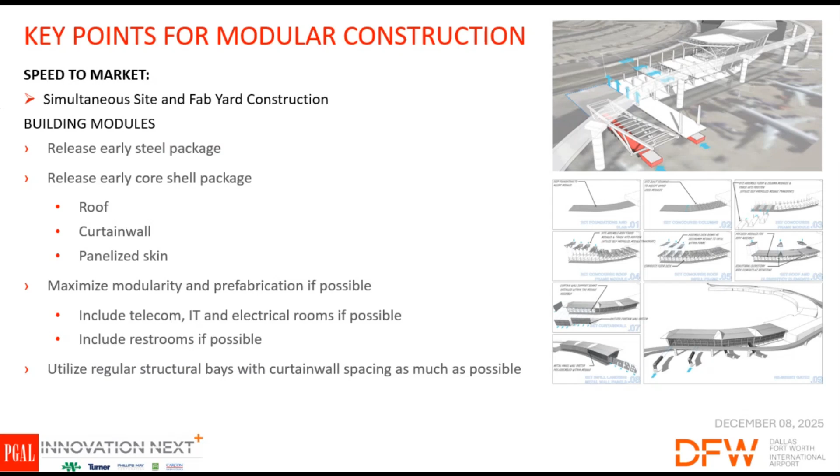There's a lot more possibilities in prefabrication. We can prefabricate electrical rooms and telecom rooms that we've looked into. So I think this is going to be an evolving industry. Other airports are copying this, so it's going to evolve from job to job.

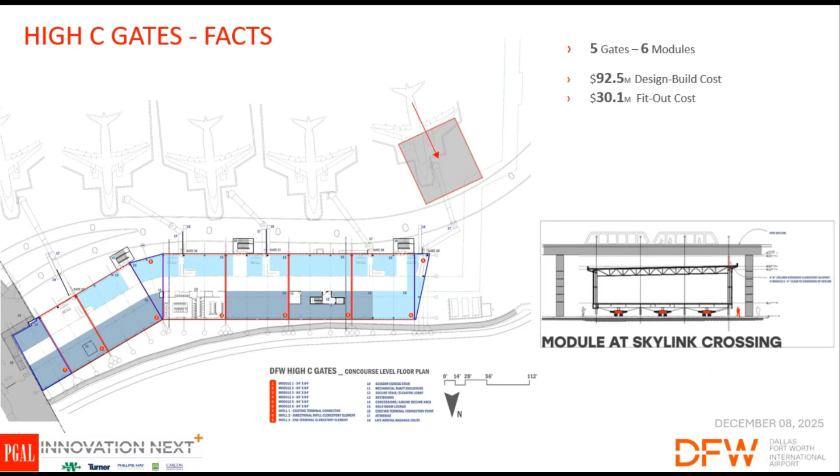So quickly, I'm going to go back a little bit on High C Gates. The size was done by necessity of dimensions. We were constrained by the Skylink, which you can see the curve on the top, and then the site on the edge. It was 5 gates and 6 modules, about $90 million of core and shell, and 30 of fit out.

So when we were designing this, we had to make sure the Skylink wasn't moving. We had constraints in the X direction moving through columns, and constraints in the Y direction going underneath the Skylink bridge. We measured it about 1,000 times, but we were nervous the very first day when we were moving the first module - is it going to fit? When the module's 50 feet away, we're thinking, oh that's going to hit. But we designed it for 12 inches of clear, and that's what we got.

This modular construction uses hydraulic lifting for the modules. The movers are SPMTs, self-propelled modular transport units. Mammoet is the company we've been using here, though there are other companies out there. Here you see we didn't put the full length of the columns on because we had to get underneath the bridge. So we got it under, spun it 90 degrees, and then for the first time, we lifted it up using hydraulic jacks in the SPMTs, which was the first time they used it.

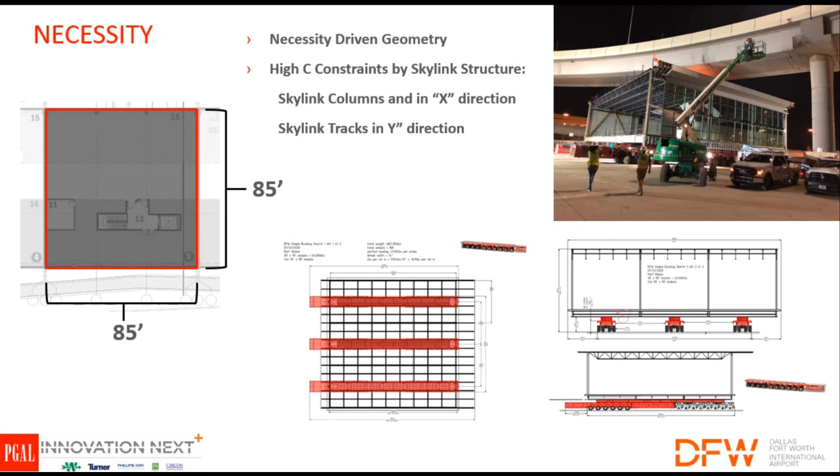That was pretty exciting. So we lifted it up, and then had to jack it up 9 to 10 feet. The columns were already there, three-quarter size columns. Then we drove through the columns and put it down on the columns that were already there. So that's kind of a baseline.

So now we're at Terminal F. Much bigger project - some of you drive by and can see it, even from the construction yard. Initially it's going to be 15 gates, about 400,000 square feet. We're doing 6 modules here, but much bigger. I'll show you here in a little bit. The first phase is 830 million.

So this project has evolved. When we were first hired, October 23rd, 2023, it was going to be domestic gates for all airlines other than American. So we go on our way designing for all the domestic carriers. We had a Skylink station here, and the Skylink tracks are here. So this was our first contract with the Skylink station there.

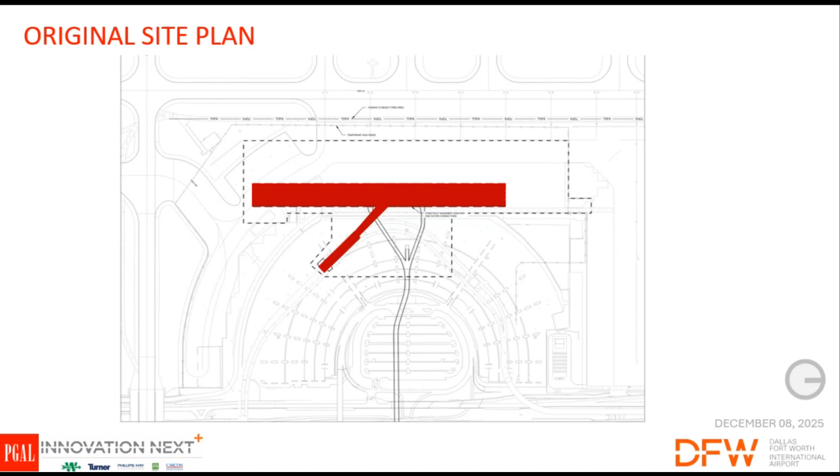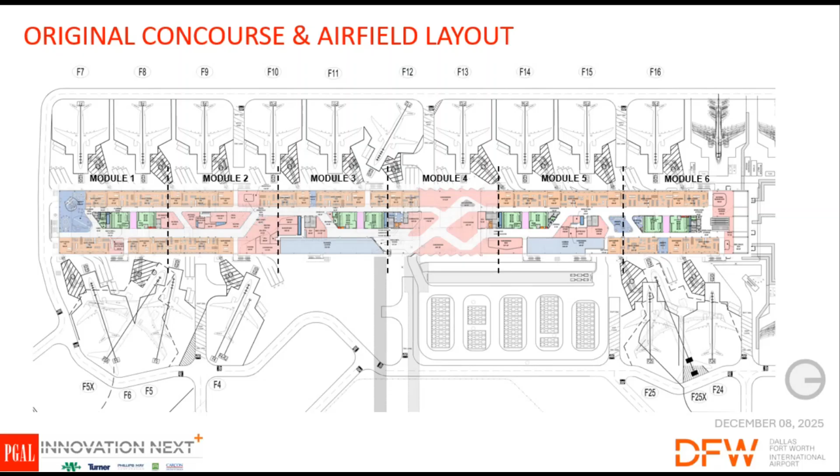This is the concourse level, the initial gate layout, and actually had planned for a tunnel. Some baggage, goods and services were going to come through the tunnel and serve the building to our basement. Our concourse plan - when American comes into play here in a little bit, you'll see that this end changes.

So when we're thinking through modular construction, you have to plan ahead. It's not just, well, the trucks show up, let's move it. You think early on, and our engineers on both sides have to have a good base. You have to have a good A to B path from the fab yard to the site. So there's a lot of logistics that go into doing this construction.

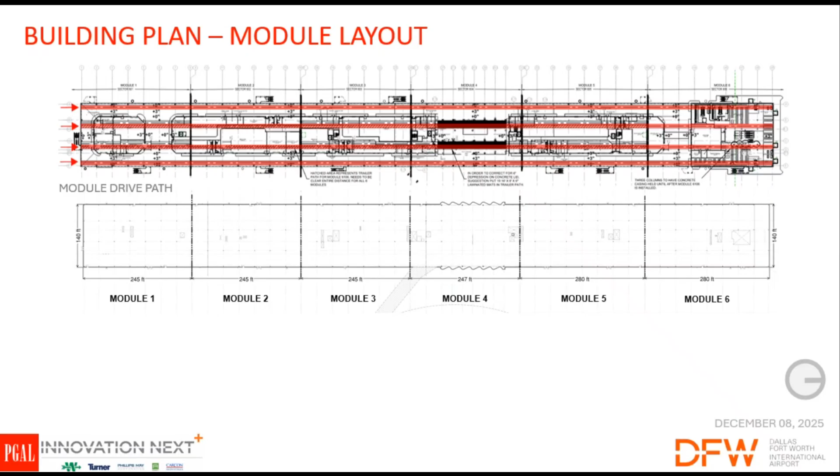We do overlays of our ramp, our ground level plan, making sure our pathway - the red lines are the pathways for the SPMT trailers. There's 4 trailers, so we think through it. And those are modules 1 through 6. So there's a lot of planning and engineering and back-checking all the way through this.

So this is a good combination drawing our structural engineers and civil engineers worked on together to help us think through this - thinking about where the proper place to load the SPMTs is on the grid of the structure. But then we have to get from A to B.

Zach here helped us figure out a good path, because our trailers are so large - 275 feet. We're not doing hydraulic lifting, we're doing basically static lifting on the SPMTs, which is only able to go up about 24 inches with the wheels that jack up. So if you've ever driven a trailer, you go over a bump or a change of plane, your bottom can drag, right? So the same thing is a worry on mod moves.

This was our path, looking through taxiway Alpha Bravo there to get into the site. Here it is - the pavement wasn't quite ready. We had to build a temporary ramp to get about a 1% grade to get to our site that Zach did.

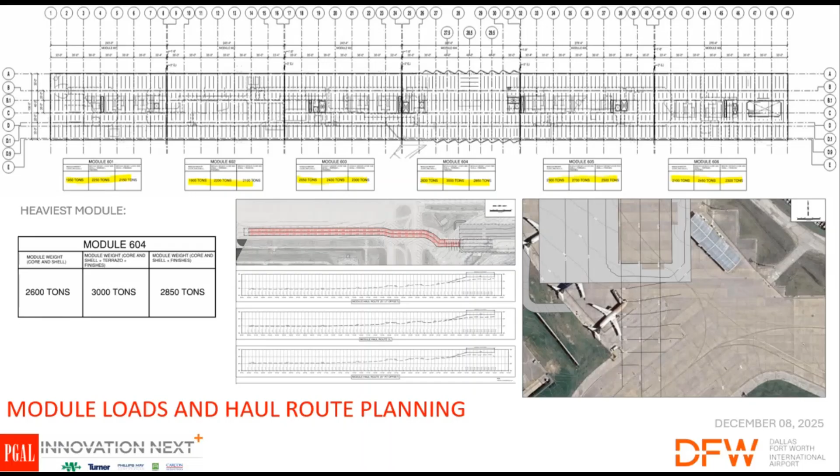So haul routes, loading points is all key stuff. Can't tell you all the secrets, but alright - so comparison, this is the good engineering slide for you guys.

So the gray box here is the High C module. I mentioned it's 85 feet square. And on Terminal F, our biggest one was 140 by 245, so basically like a football field we're moving. If you compare the size, the 85-foot one is 430 tons, about 860,000 pounds, and we had 3 runs of trailers, 168 tires. Do the math, it's about 5,000 pounds a tire.

Terminal F, much bigger, 140 by 245, 2,600 tons, 5,200,000 pounds. We had 1,024 tires on the trailers, with 4 runs of tires, and per tire it actually came out less.

Some other fun facts: a CRJ 200 is about 88 feet, which is about the size of High C. And even an Airbus A321 is the short direction of Terminal F. So there was a lot of worry.

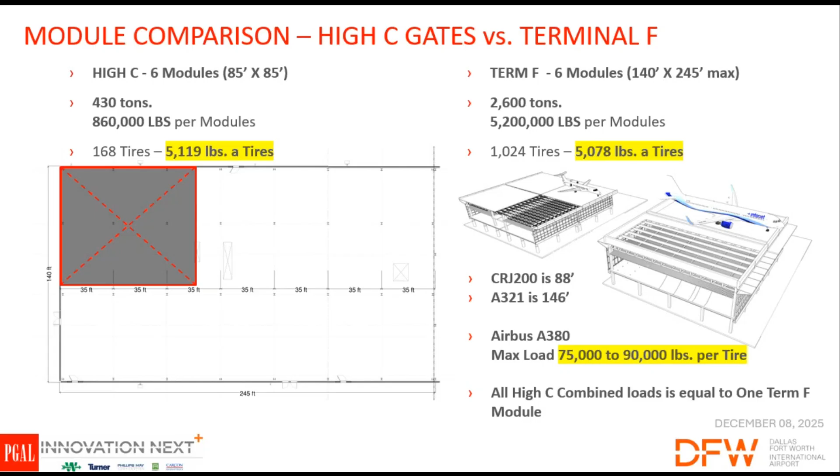But we've also added international - it was domestic only, now we have international. So if you ever fly international, you go through FIS, Customs, Border Patrol. We've incorporated all those elements into the project.

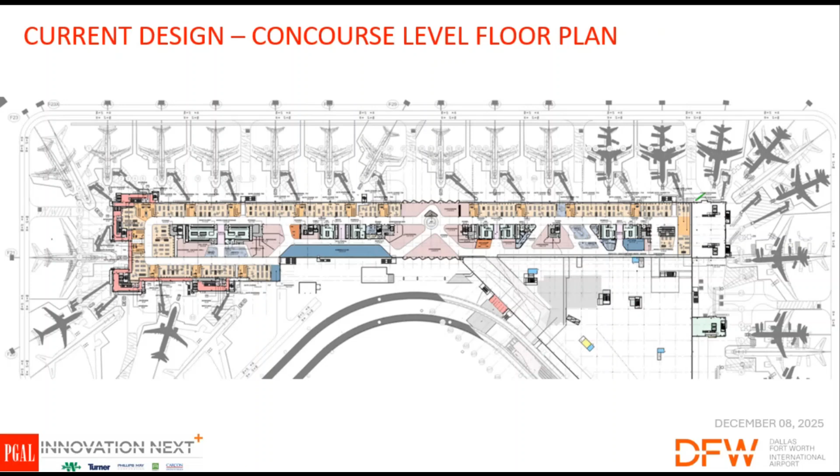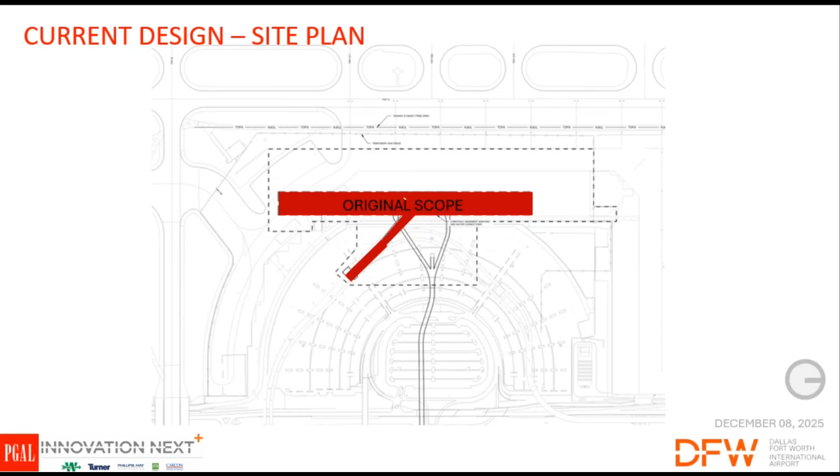So here's the first site plan. I'm going to animate it. That was the original scope and the footprint, and now the current scope.

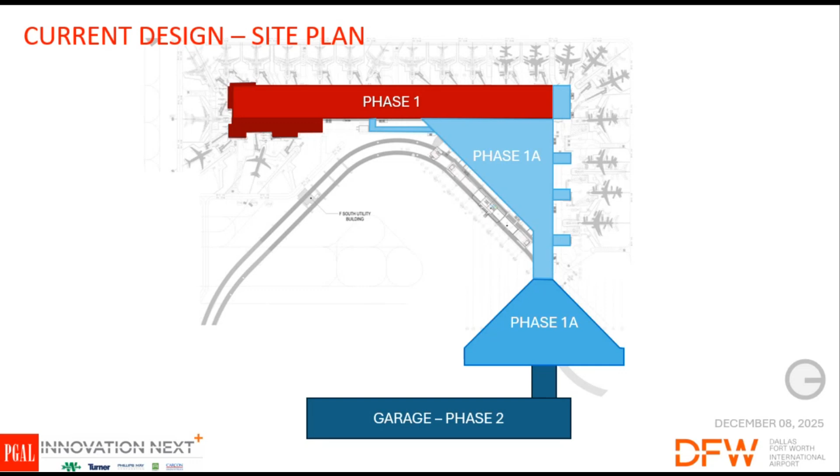But day one, the initial customer drop-off point is via Skylink. So you go to other terminals and come to Skylink to get to the terminal, and that Skylink station is now here. It'll be open on opening day and then have connectivity for phase 1A.

Some other fun facts: larger fabrication of the modules, the 245 by 140, having a good structural grid system, having that modular. We have a 5 feet smaller grid that goes to a larger grid of 35. Repeating is really key to having a repeating of detailing.

Other things we did: the modules will drive over some mat slabs. At one point, we had a mat base.

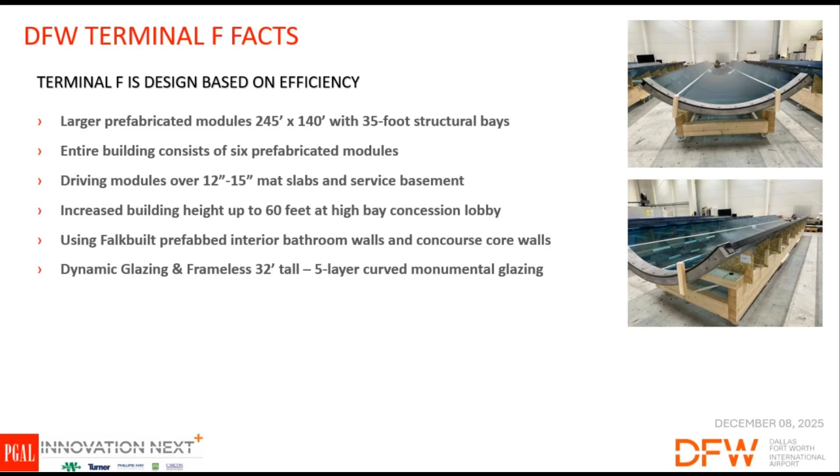Okay, that's a good question. And that should be a presentation for another engineer, maybe next week if you want it. It's not part of our scope.

Jacobs is designing a phase that will take out 2 rows of columns, then build a super truss of some description to hold up the Skylink structure so that the next phase, the Group 3 aircraft, can drive underneath the Skylink. I don't know what the structure looks like, but it is being designed by Jacobs.

Are there any Jacobs guys in here? Here we go. Are you designing that? Okay, well, I think you just signed up for the next presentation.

It's going to be 2 different directions for Group 3, not Group 5, but it should be interesting. Good observation.

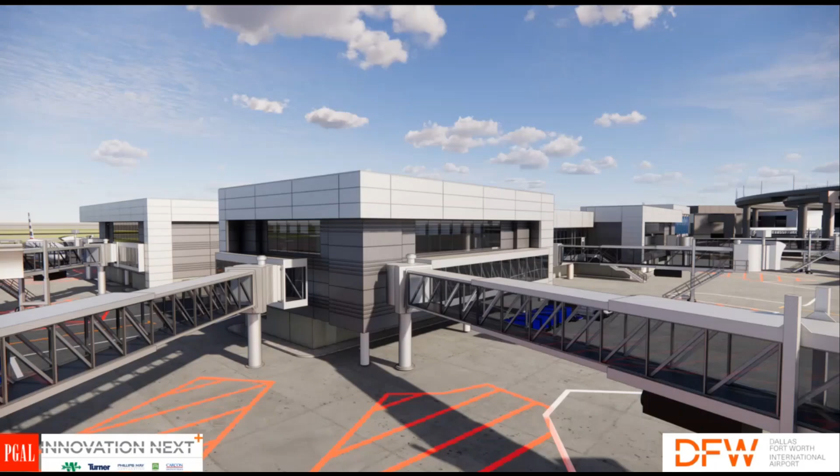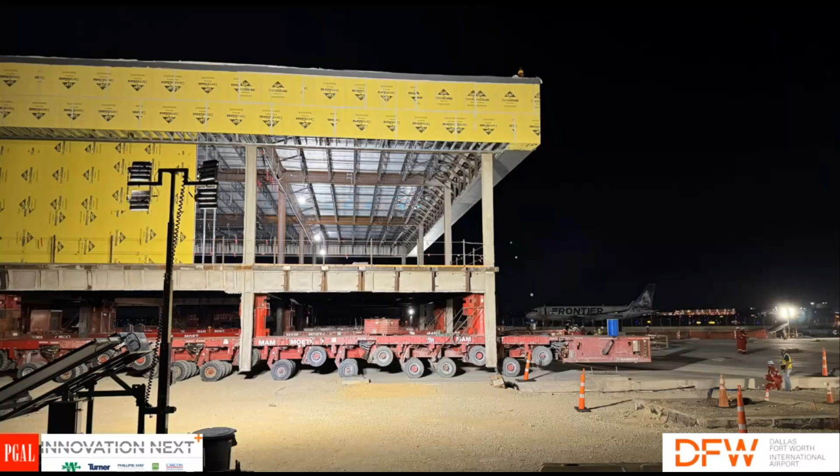Here's another view, and you can see how the tires are wheeled up there. They're stroked up, and you'll see in a second a column go right there.

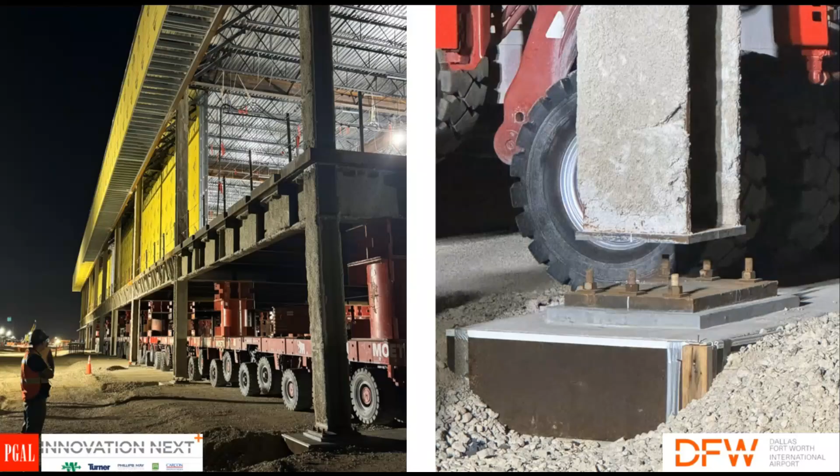All right, so it's all been laid out, it's ready, and they very slowly move it down to the base plates. Showing a secret here - it's good not to have to try to get an anchor bolt to hit a hole, it's too much brain damage. It's going to sit on the base and weld it.

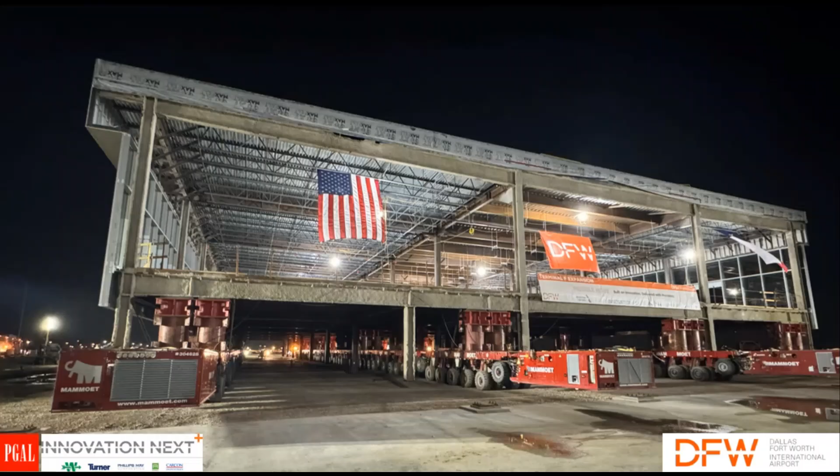Here's another view. You can see the trailers pretty well, all the tires.

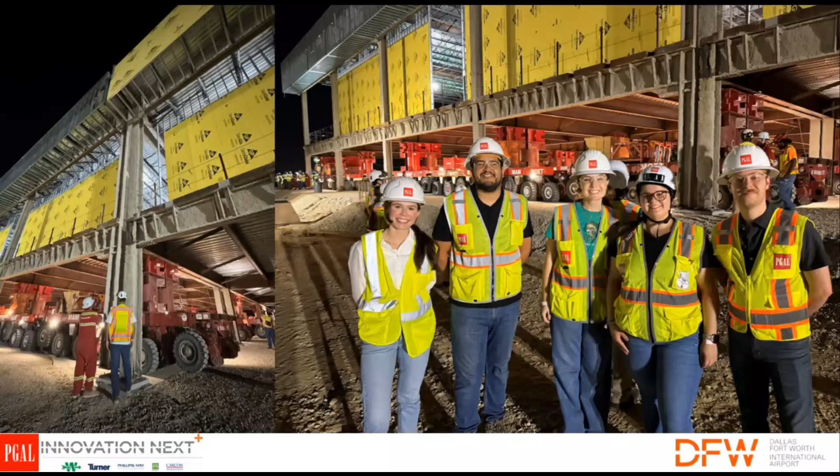Here's some of our design team. And Eddie from PMA, I think that's the back of your head, Eddie.

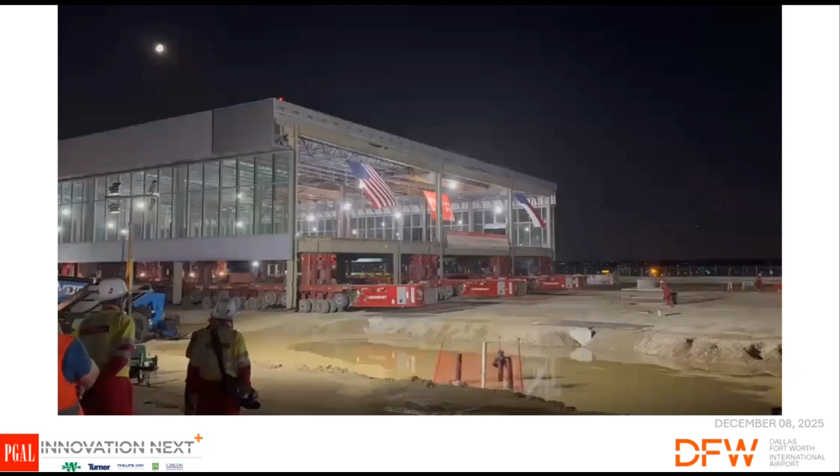Okay, this is a video, and this will conclude the presentation. So it's actually driving over a structural basement - it's a concrete cast in place basement. We did back shore it just for the rolling loads.

Did it go? Okay. Yeah, I kept the video kind of short, but you can see how it's going there.